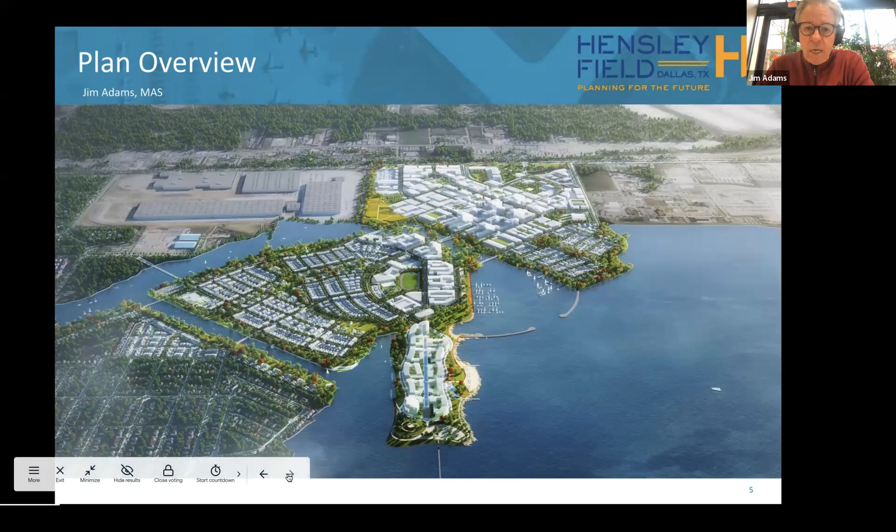The plan that's emerged is one that we have taken with input from both your group, the technical advisory group, and the stakeholder advisory group. We have tried to adhere to the principles that were established for the plan. What has emerged is a walkable mixed-use community with about 3.7 million square feet of commercial or institutional non-residential uses and 6,800 residential homes, and an interconnected network of open space comprising about 185 acres, or about 25% of the overall site.

The plan has really tried to create a strong orientation to Mountain Creek Lake with trails, a new marina, and water-oriented recreational uses. Leah Hales will talk a little bit more about that in a moment. Historic preservation, adaptive reuse of some of the key existing buildings, as well as some of the artifacts and features of the site, are highlighted.

Jeremy Klopp from Fehr & Peers will talk about the multimodal transportation system of the plan. Gail Vittori will talk about our environmental goals and our objective to achieve the goals of the climate action plan with net zero construction, the maximization of renewable energy sources, and then creating a diversity of housing choices in a mixed income community. We have developed a program in conjunction with the housing department of the city that will ensure that at least 20% of all homes will have long-term affordability for qualified applicants.

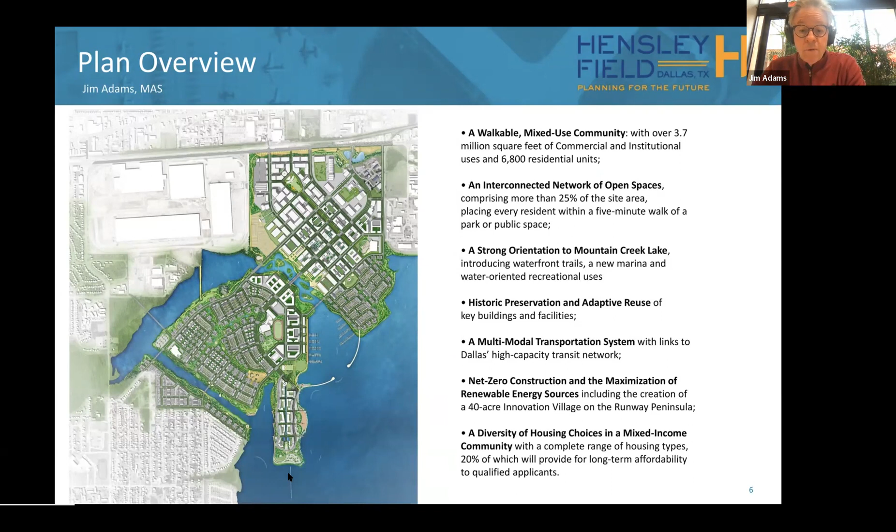And just some of the images that you may have seen in the master plan. The project will include a high-capacity transit spine through the center of it that will be able to support BRT, bus rapid transit, or even light rail transit should the densities achieve the ridership objectives for DART.

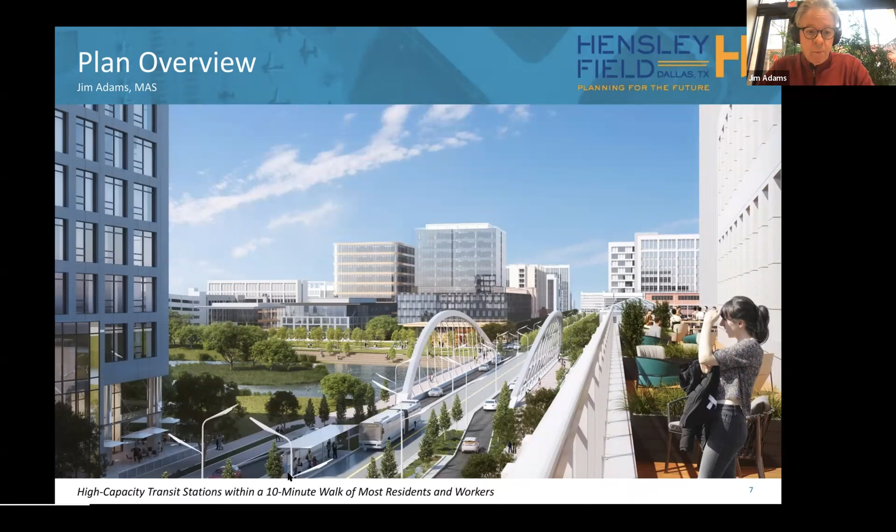The whole open space system—every home will be within a 5-minute walk of a park or open space, and many of the open spaces include blue-green infrastructure.

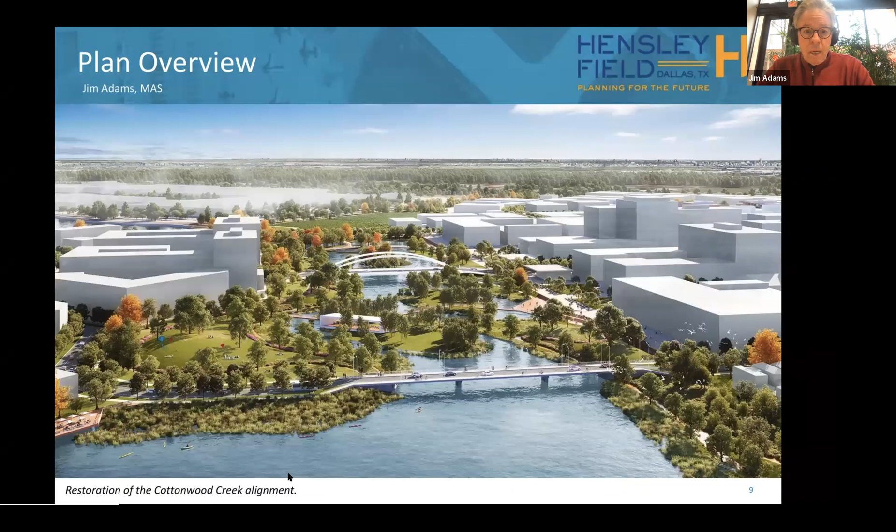What we are exploring and will continue to explore through the implementation phase is the restoration of the original alignment of Cottonwood Creek through the site. We believe this is important from a water quality standpoint, and it also enhances the overall amenity of Mountain Creek Lake.

We are proposing to create what we've called the Innovation Village on the 40-acre runway peninsula that projects into Mountain Creek Lake, as a demonstration project for sustainable development.

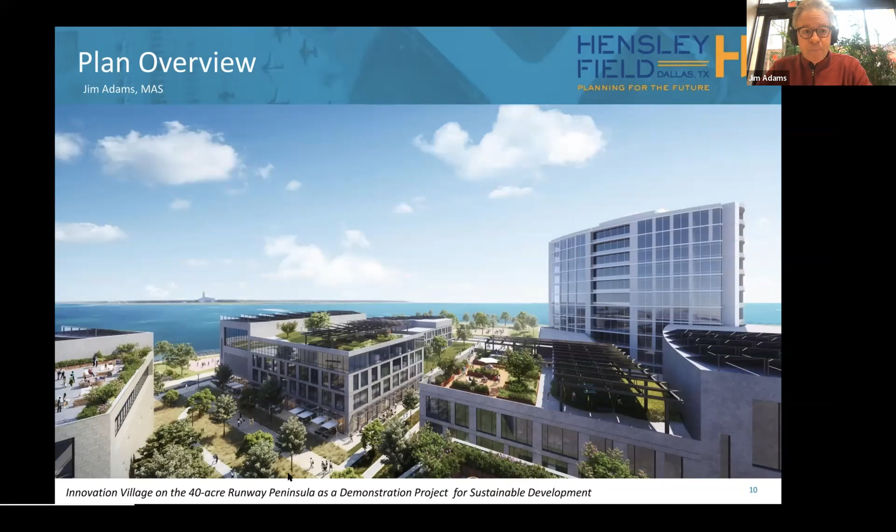So with that, what we're going to do is organize this meeting into 5 sections, where we'll go through the recommendations of the plan under each of these areas. Jana McCann is going to start out and talk about the land use, economic development, and affordability and diversity recommendations of the plan.

Hi everybody. First, I just want to orient you to the slide itself and what directions are where. At the top, and maybe MK can help point things out with the cursor, is Jefferson Street, or just Jefferson, at the very north edge of the site. And as you'll see in the first recommendation, that is where we're orienting — see all those purple parcels, which represent a potential for corporate and institutional users.

Throughout this whole process, we've talked a lot about attracting a catalyst user to the site early on. So we imagine that catalyst user will want high visibility and easy access from the major arterial roadway there. That's all that purple zone.

Second, we've really been having a lot of discussions about incorporating a film studio complex on several of those parcels farther to the east, which you'll see up in the northeast, in purple. Sorry — okay, we've got the bad east-west directions going.

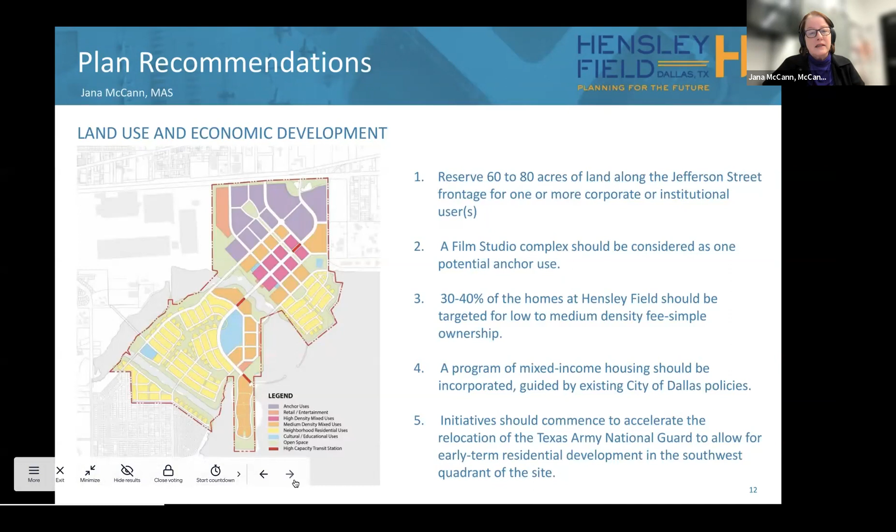So this is that plan laid out, so that you see, again, East Jefferson Street at the top. You'll see the 4 big areas along the north, starting from the left or the west: the development of a market district, which would include what we've heard about from day one — the interest in a full service, high quality grocery store that could serve this whole area. And then what we're deeming the West Campus, all you see in blue there, for anchor uses.

And then on the East Campus, that's probably got the highest potential for a film studio, because of all those existing warehouses that you see — depicted as those boxes numbered 7 — to reuse those existing big hangars, which can be ideal for film production uses. You see a little green spot, number 8, that's where the original entrance into the site was, and the historic officers' houses are still located there, originally from the 1930s.

And then you see a purple zone titled United States Air Force, and that's still a pretty big zone and leasehold that will continue to go on until about 2039, at which point then we can start to introduce new uses in that area. Go to the next.

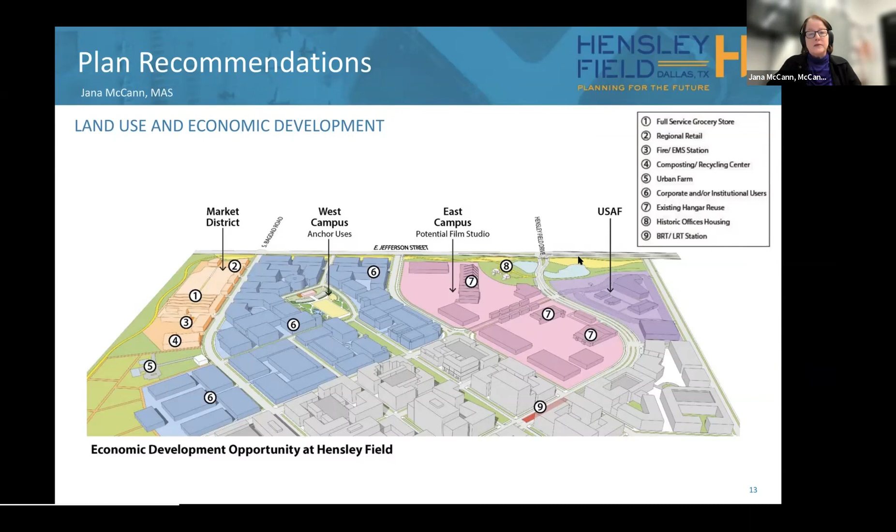So we have quite a few strong urban design principles that are guiding how we've laid this whole project out, and that would continue to guide the development and implementation of the master plan. First and maybe foremost is that connection to nature and respect for water and clean water, clean air, access to trails, parks, and open spaces.

Then compact and walkable districts and neighborhoods, which Jeremy will talk more to, but really creating block sizes small enough that it's very easy to walk from one place to another, with a high density of different connections. Then it's very important to tone down the dominance of the automobile.

We do that through the design of the streets, but also through the design of individual building sites so that we don't have huge parking garages, for example, facing the public space and the public streets and urban realm. Then, and Gail Vittori will talk more about this, a really resilient architecture of high quality, highest levels of green building, and then livable and compatible density. That's really speaking to a spectrum of different levels of density that can compose a really great neighborhood. And then finally, an active and engaging public realm, which we'll see in a bit as well.

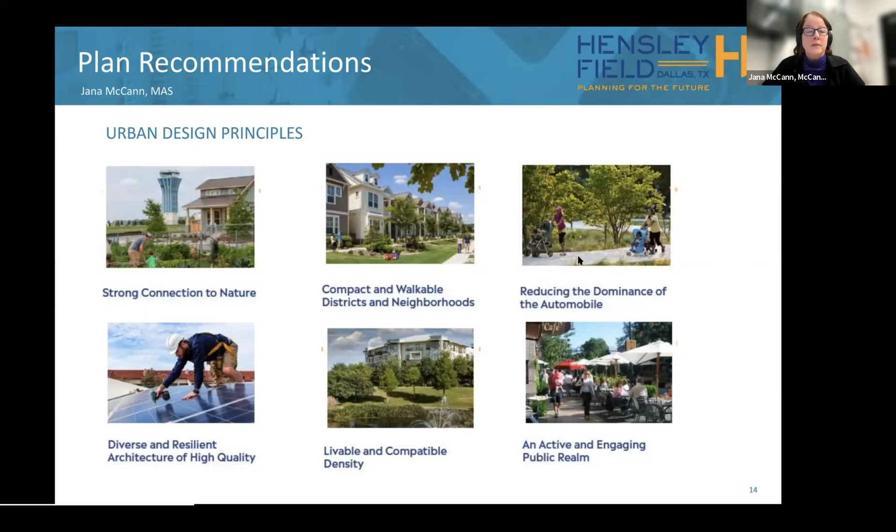In terms of that housing, we're really wanting to create a full spectrum of what's been deemed missing middle homes, giving a variety of different types of housing at different scales and different price points. So it's not just a development where there's some detached single family homes, and then at the other end of the spectrum the big multifamily or apartment buildings.

But there's just a broad range of all those in between housing types. 20% of all of these homes would be affordable, which is consistent with City of Dallas housing policies. For sale housing would need to hit 80% for people who make 80% or below of the area median income, and for rental, it would be people making 60% of that level. Affordable homes would be completely and seamlessly distributed throughout all of the housing areas and neighborhoods of the project and be indistinguishable from those market rate homes.

So we've got some great tools to really help implement the affordability aspects, one of which is a community land trust, and then having the master developer and sub-developers actually cross-subsidizing the housing. And then with the use of low-income housing tax credits, we can attract those, or the individual site developers would be competing for those tax credits to help tremendously with the financing.

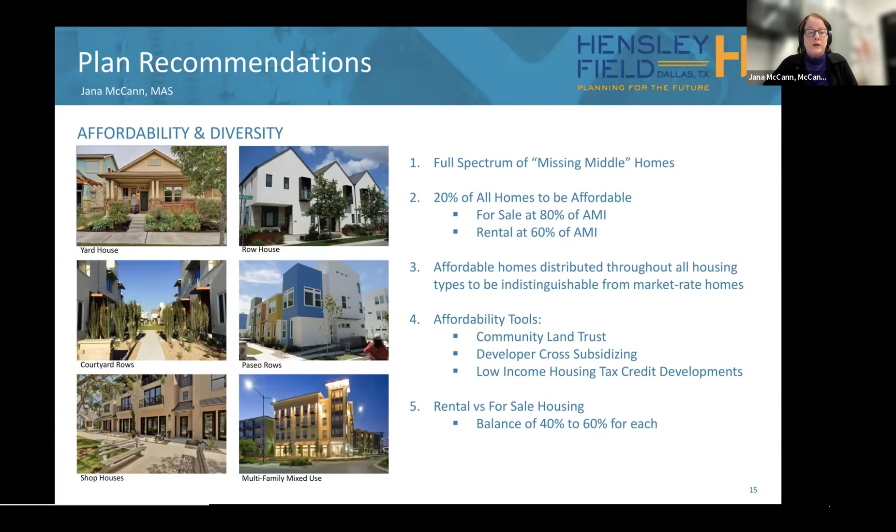So in terms of the land use and economic development, affordability and diversity, all of those things packed into one question. Here are the Mentimeter questions that Arturo went over with you all. We're anxious to see your voting on all of this.

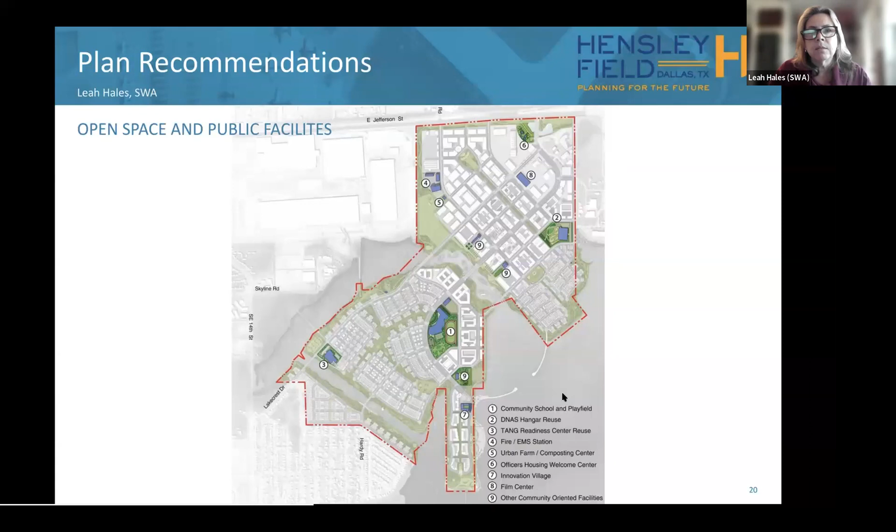The existing officers' housing we've talked about, that might become a welcome or sales center. The innovation village down below, that's going to be part of the research and teaching people about sustainability. The film center, which we've already mentioned, may have a publicly accessible part. And then the other community-oriented facilities would be outdoor markets, places, and plaza spaces for events, things like that.

So this is just showing you one image of that blue-green infrastructure. Essentially, this is a way to integrate our stormwater management and cleaning of the water within the linear park systems. There are trails, playgrounds, maybe little urban community gardens, things like that, that are all part of those linear park systems, but they also are functioning within that space.

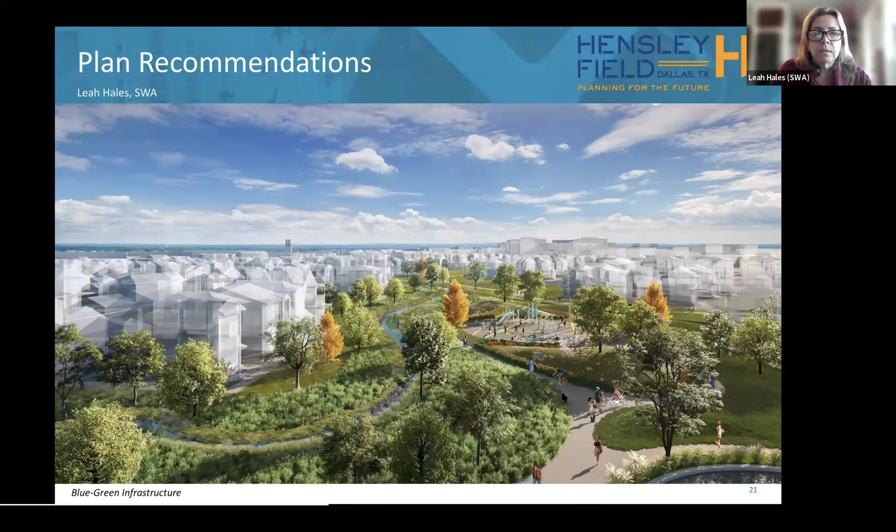This is in one of the residential zones. And then this plan here is really just talking about different park typologies that happen throughout the master plan. This park is kind of in the more urban district, where we would have our catalyst user location, but it might be a central park for both workers, or employees, and also for the residents as well, with a little more urban scale, urban design to those public open spaces.

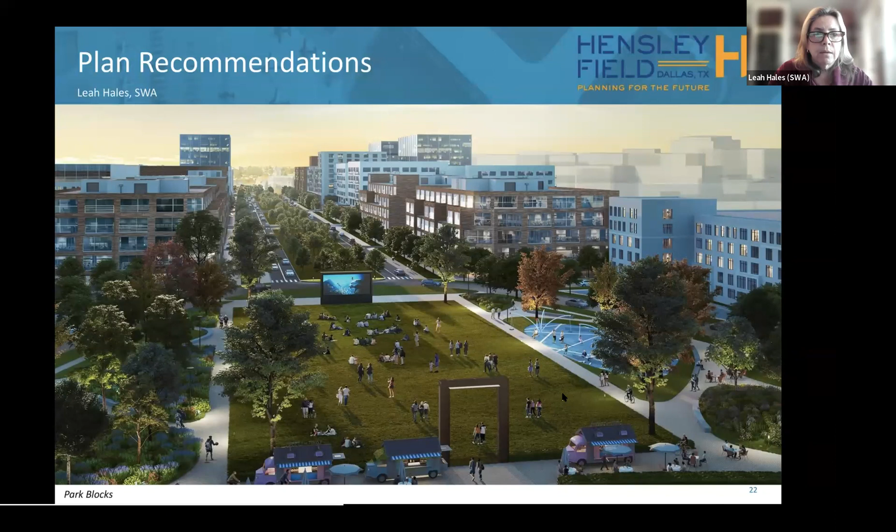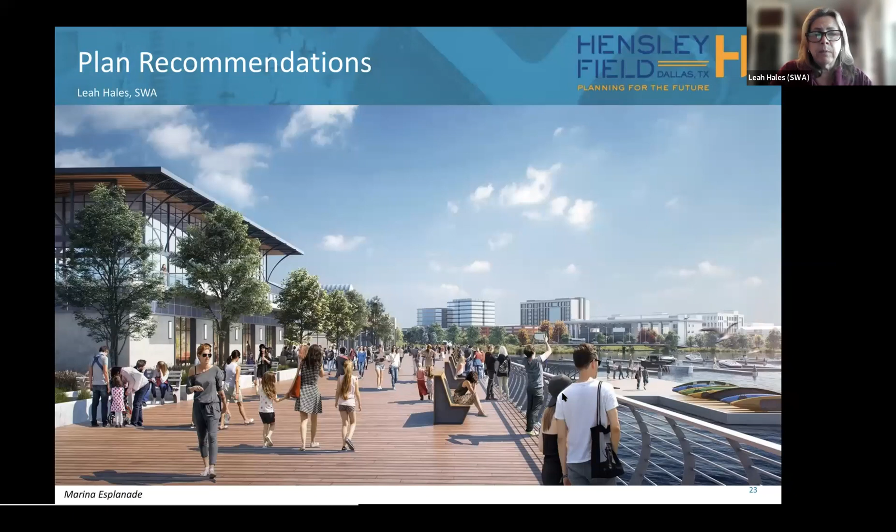And then this is our waterfront marina park area, showing it adjacent to the retail, but really having access on the water. This would be where the Cottonwood Channel reconnection happens, showing and integrating that waterfront feel. This could really be a game changer for the city of Dallas, areas like these.

So, historic preservation and adaptive reuse - this is a historic site that's changed over time, but it's basically been a military site for maybe 60 to 80 years, even close to 100 now. Preserving the history of Hensley Field for future residents, we're showing the preservation of the officers' housing, the cemetery, the main maintenance hangar from World War II, the water tower, small arms magazines, plus multiple other things. We're prioritizing how these adaptive reuses will be used and how they take place, working with the Historic Preservation Office to develop a strategy for protection and reuse of these existing structures.

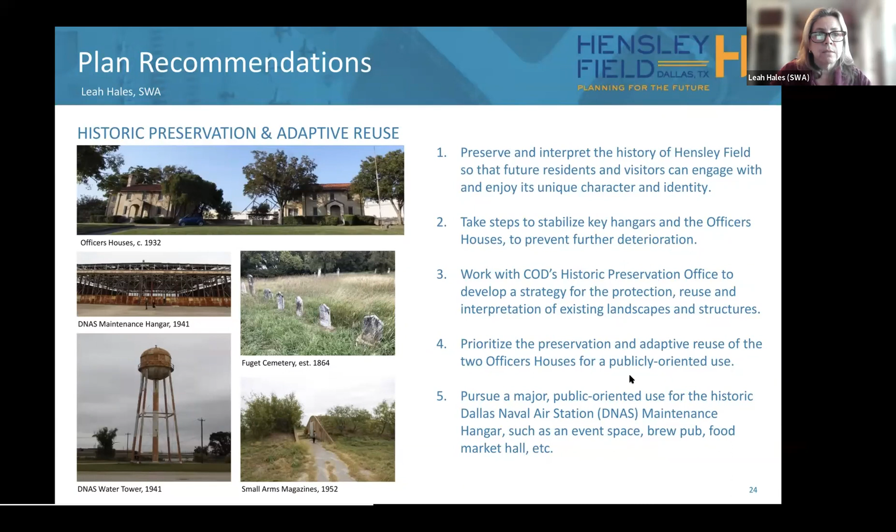In addition, we've incorporated a historic trail system. This is about a 5-mile trail, just the outer loop itself - not all of the trails on site, just one of them. But really having this trail system where people can walk from these places and experience these different pieces of history, with interpretive signage explaining what this site was before.

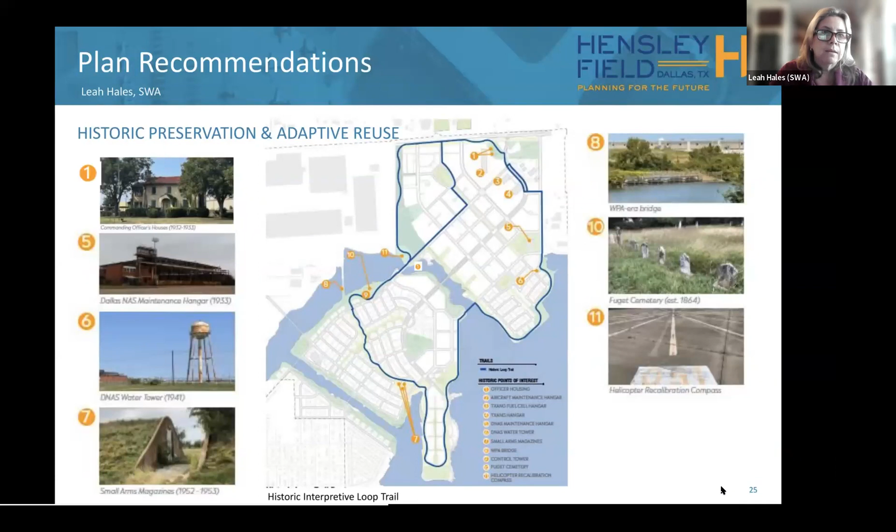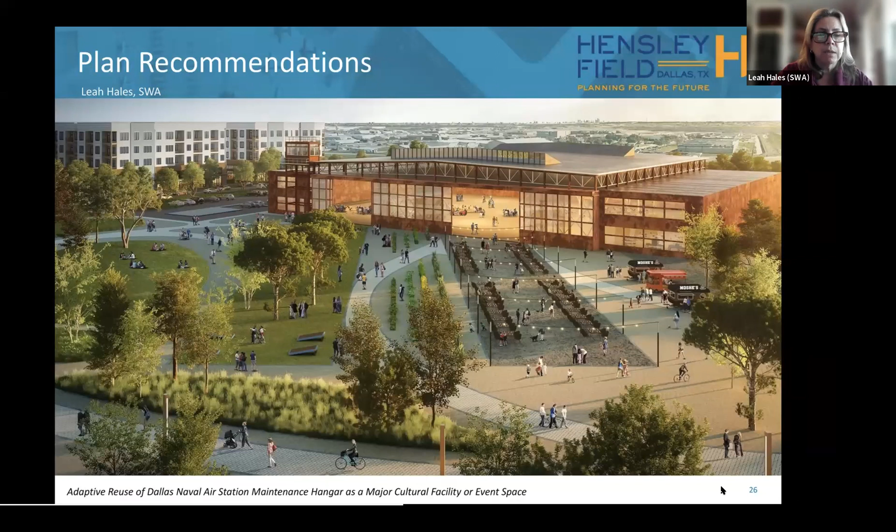So this is a concept rendering we've done for the maintenance hangar, the World War II one. We know this structure would need a lot of work, but we think it could be utilized in a way that would be a great public facility. It could be cultural or event space, it might have a beer garden, it might change functions over time. We're showing it with this beer garden atmosphere outside, but it could be for any kind of community event center, an open air concert place - there's multiple opportunities, and we've got some ideas we're going to share further.

So, open space and public facilities, historic preservation, adaptive reuse - these are the same questions you had in the last section, but this time focused around open space, historic preservation, and adaptive reuse. Again, we're looking for where on this scale you see that we're fitting. Are we way off the mark? Are we getting pretty close? Is it perfect? Let us know, and then we'll open it up for comments.

Does anyone have a question they want to open up while we're taking these votes?

Let's see, the lowest scoring thing is the concern about whether these recommendations could be successfully implemented. Does anybody want to talk about that?

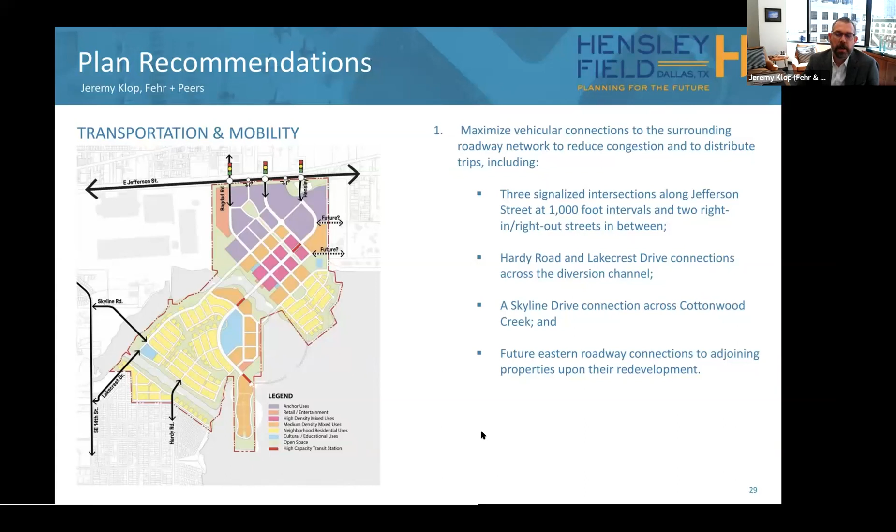So key points here on the vehicular side, we are looking at 3 signalized intersections along Jefferson and 2 right-in, right-out type intersections to really distribute trips across that edge and maximize the connectivity into the site.

We're also looking at multiple connections into the site to ensure that the edges remain open to access from surrounding neighborhoods and Grand Prairie in particular, looking at a new connection to Skyline Road on the southwest portion of the site, as well as Hardy Road, and multimodal enhancements to the Lakecrest Drive access point. The intent is that we can provide those connections so that the amenities on the site, the commercial, the retail, the loop trail, are all available and accessible to the surrounding communities, and also allow us to distribute the demand for access to that site across multiple access points.

There may also be opportunities on the eastern edge for future connections. So we've thought about the network in ways that would connect there potentially, and those are shown as possible connections.

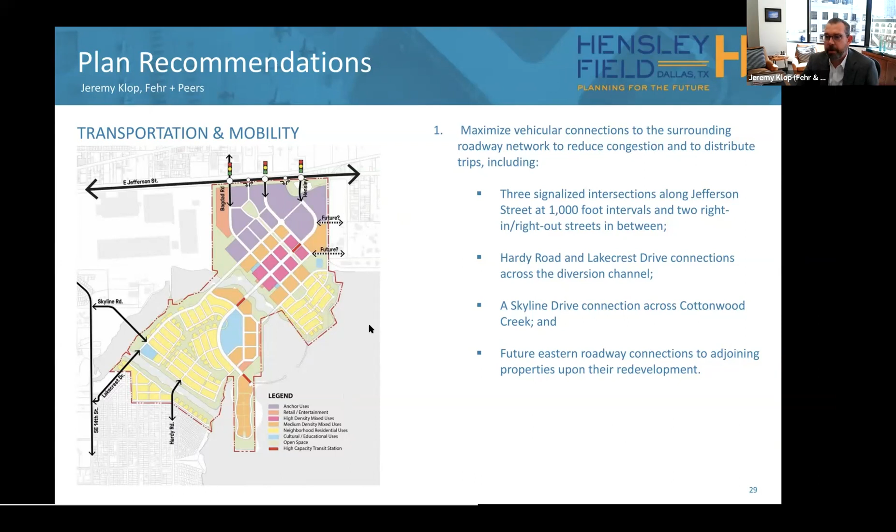On the next slide, I'll talk a little bit more about on-site connectivity. Really, a few organizing elements for the networks here. One primary one is a transit spine, a center-running transit cross section that we've envisioned to penetrate deep into the site.

We've been coordinating closely with DART and talking with them about things like their density thresholds for BRT and LRT, potentially a long-term extension in the Jefferson corridor. The amount of development, both on the residential side and on the commercial side here, exceeds their thresholds for density, such that we're really confident about the long-term transit organization of the site being a positive element there.

We're also organizing things in such a way that this low-speed network of trails and separated facilities support access throughout the site, whether it's to the school site we talked about or some of the other amenities and commercial opportunities on the site. The idea there is really designing a network and a set of cross sections that allow younger folks, children, maybe less experienced cyclists, older folks, to move comfortably and safely without fear of high-speed collisions.

Really minimizing that worry and concern by designing roadways to deliver the operating speeds we want and really minimize the need for enforcement. Some of that complete streets design is really pivoting off of Dallas's new design manual along those lines and reflecting a lot of that vision. That's been a really helpful resource, and really trying to ensure that walkability and compact design.

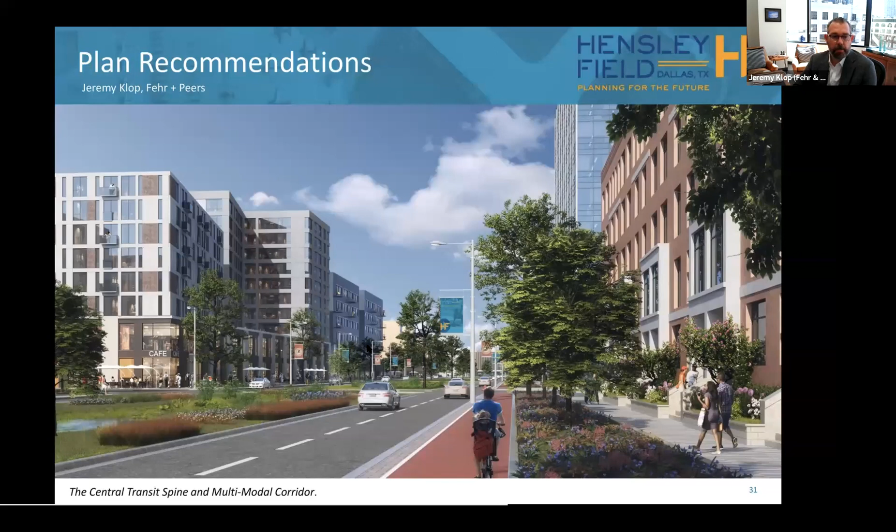A couple renderings here. This is a rendering of the central transit spine and multimodal corridor. You can see generous walkways and separated bike facilities there, along with the vehicular side and a sense of the scale. One of the real benefits of the center-running transit spine, and you'll see this in some of the park block cross sections in the plan as well, is the opportunity for central shade and vegetation in the center of the cross section. These multiple rows of trees and shade and comfort along the way really enhance some of those separation aspects, but also provide a tree canopy opportunity that some other street designs might not.

Next slide here is really an example of how those transit stations can be well integrated. We're envisioning BRT levels of service here with highly amenitized stations, real-time information, shorter crossing stretches to and from this facility, and it really breaks up the roadway cross-section in positive ways for access.

It also allows us to sort of dynamically manage the curb edge for parking in terms of pickup drop-off activity and thinking about the different aspects across the site where we might want to manage the curb-adjacent parking differently. So you'll see that in a number of our cross sections. There's also a section in the plan about emerging mobility and the goods movement, pickup drop-off aspects there as well.

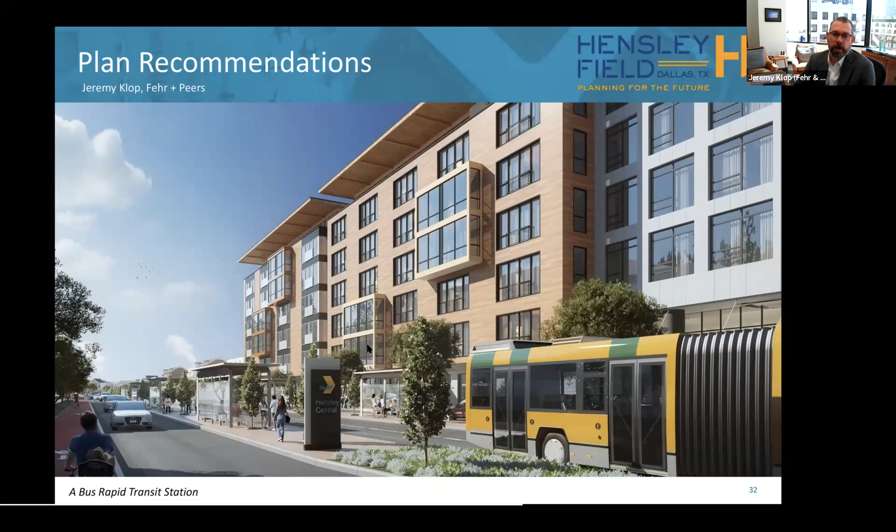So I'll keep it tight there and transition to the discussion. We'd love to hear your feedback about how close we are to hitting the mark perfectly, or what else we could be doing to modify and improve this section.

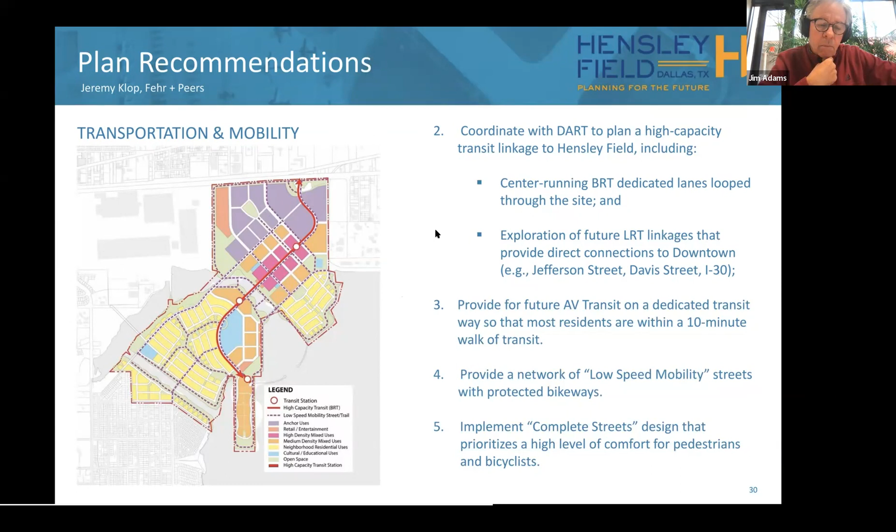One last comment: the purple is the anchor use, correct? Yes. There may be an opportunity—I mean, this thing can change. You may have a corporate anchor interested that comes in and wants a station closer to Jefferson, so it may be possible to pull back or add another station in there. Sure, it really depends on that corporate user and whether they want direct access. But sometimes corporate users don't want a bus stop next to them.

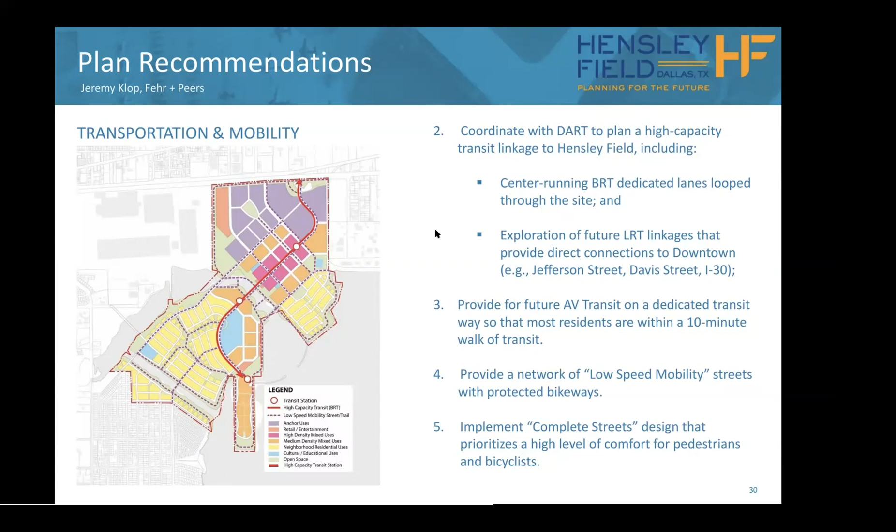All right, well, thank you for those comments. I'm going to let Gail Vittori talk a little bit about the sustainability policies of the plan and the utilities.

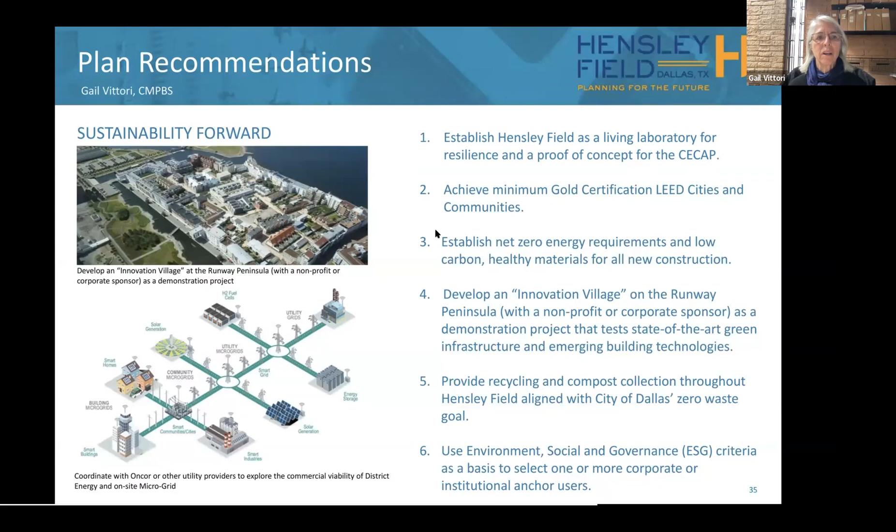All right, thanks, Jeremy, and hi everyone. So many of the ideas put forward in the Sustainability Forward concept have been threaded through many parts of this presentation that you've already heard, but really the big idea is to establish Hensley Field as a living laboratory for resilience and a proof of concept for the city's comprehensive environmental and climate action plan. That's the overarching structure these recommendations are prompted by.

Firstly, we have the goal to achieve a minimum of gold certification for LEED for Cities and Communities. This aligns with City of Dallas requirements, as we understand them, for LEED certification for buildings. Using LEED as a structure, and LEED Cities and Communities specifically for a project of this scale, seems very appropriate. A preliminary assessment put us comfortably in gold certification range, with a potential to achieve platinum, which is the highest level in the LEED certification framework.

We've also established a goal to achieve net zero energy for all new construction. This is also specifically tied to the CECAP goals, and to take advantage of low carbon and healthy materials for all new construction. Many of you might know that embodied carbon is becoming a very hot topic right now, just because it represents such a significant part of overall carbon emissions. And to marry that with those materials also being healthy, we think is very much aligned with the guiding principles of this project.

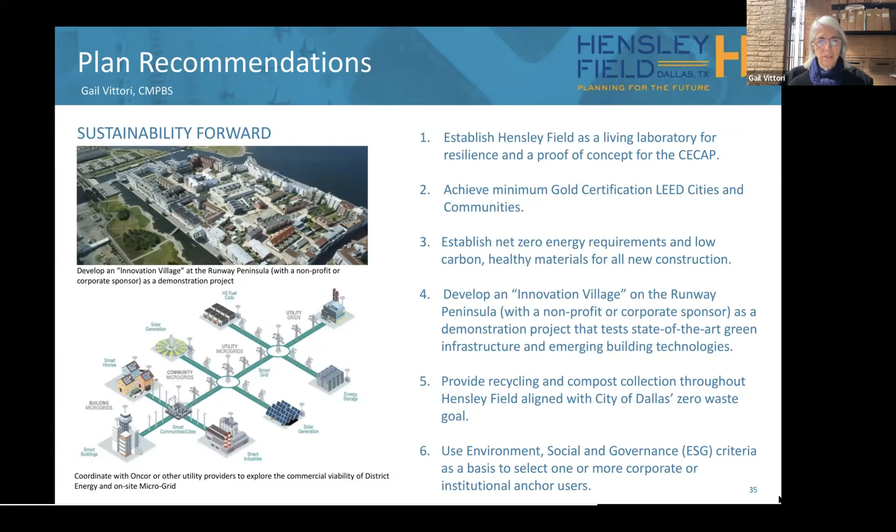And then finally, we have identified the environmental, social, and governance criteria to use as a basis for selection of one or more of the corporate or institutional anchor users. ESG criteria, many of you may know, is increasingly becoming a benchmark for good business, and we think that is also very aligned with the overall guiding principles.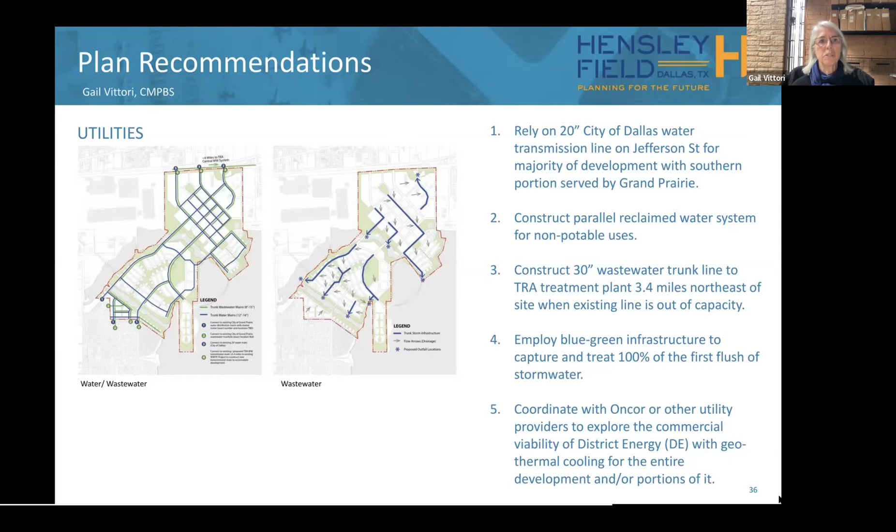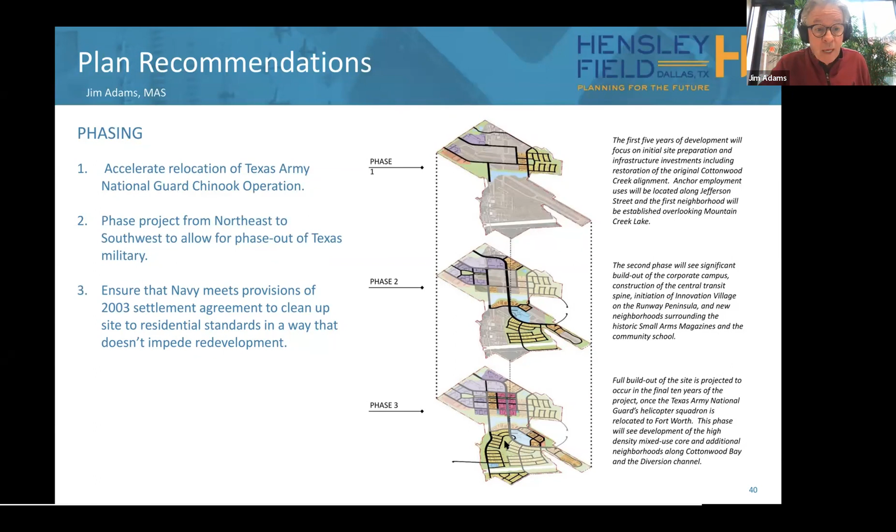A part of the whole phasing is the Navy's responsibility to clean up the site to residential standards. Their agreement with the city requires them to do that in a way that does not impede redevelopment. So that's generally the phasing strategy.

I'm going to let Dan Guimond from EPS talk a little bit about the cost of development and the potential revenues. Thanks, Jim. So the project team, Stantec, SWA, and McCann put together all of the horizontal infrastructure costs on the project, infrastructure and public amenities. Over the course of the 20-year development program, we have total costs of about $390 million.

And total revenues of about $353 million, which in aggregate is a financing gap of about $37 million, which for a project of this size and magnitude is a very manageable number, at least in aggregate.

However, the deficit or funding gap is very much front-loaded. Over the first 10 years of the project, there is an estimated gap of $99 million in years 1 through 10, basically what we're calling phases 1 and 2, with the positive revenue starting to generate after that period of time.

With a positive cash flow of $61 million over the second 10 years of the project between years 11 and year 20, in terms of our estimates.

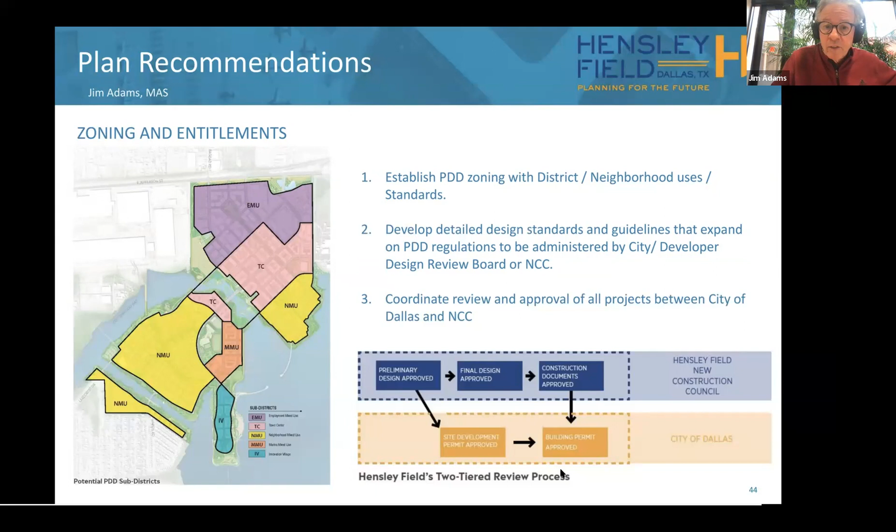So before a project could get approved by the city, it would have to go through this design review process with the city-developer design review board. This is to make sure the goals of the master plan get carried forward, while also maintaining flexibility - we don't want to have to go to city council every six months for plan revisions. So the zoning is fairly general, while the design standards and guidelines are fairly specific.

With that, we're going to get you to vote on the policies related to implementation - phasing, financing, governance, and entitlements. I appreciate your patience in staying on beyond the 90 minutes we had designated.

I see we have a comment in the chat from Susan Alvarez. Jim, if you want to address that - power over Ethernet talk.

I can't speak specifically to that, but if somebody else can, or Susan, if you want to expand on that idea - power over Ethernet technologies.

It's a relatively new technology where your whole building is basically powered over Ethernet. It requires a lot less wiring, you don't have the electrical losses from going between AC and DC power, and your overall building energy use is much lower. It may be something to explore as part of the design of future industrial, institutional, or commercial buildings.